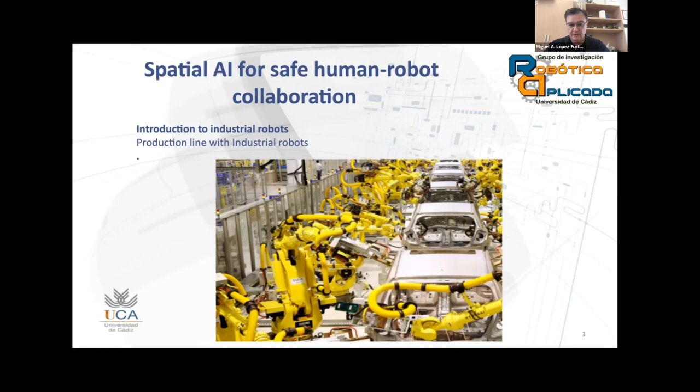About the production line with a lot of robots working without workers. Okay. Well, the typical robots, the classical robots, the brands are KUKA, FANUC, Motoman, ABB, etc. And all of them are directly related to a color. Normally, KUKA has the orange color, FANUC yellow, Motoman blue, etc. But these are the classical robots. Okay, this is the robotic arm, degrees of freedom.

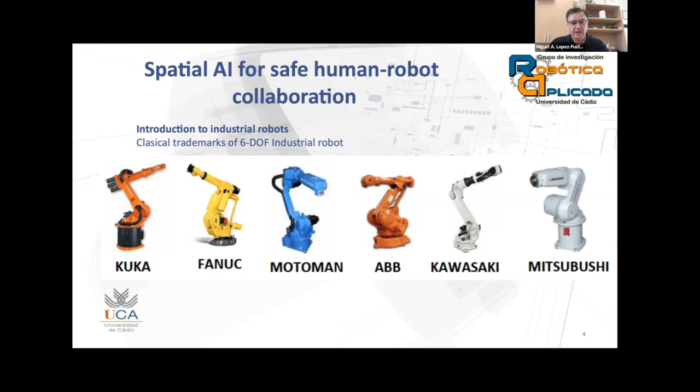The problem, what's this? The classical robot needs to collaborate with the human, and it's possible and it's necessary to collaborate near them. For us, to increase the human-robot collaboration, it's necessary that the robots or around the robot have a lot of systems to ensure the safety of the human. For that, imagine the typical optical barrier or the other things that are normal in the industry. When you try to define the workspace between the human or the worker and the robot, it's necessary to have a protocol to work with them.

In this slide, we can see a lot of ways to collaborate with the robot. Okay, when the robot has no safety system, it's necessary for the robot to be far from the human. When you need to collaborate very near, very close to them, it's necessary that the robot has a protection, or the robot detects, in this case, the force or the collision with the human or with other things.

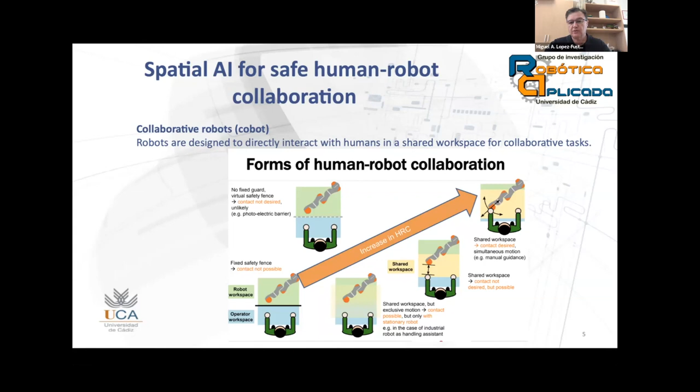Okay. For the audience here who maybe isn't a professional in this field, or maybe has never worked with industrial machines, I saw a very funny sticker the other day which illustrates this point well, and it said, "This machine cannot tell the difference between metal and flesh, nor does it care." Yes. Yeah, that's exactly why we need things like this. Yes, for that it's necessary to have this protection. Now there are a lot of collaborative robots that detect the collision, but it's not enough for the work between the human and the robot. Okay.

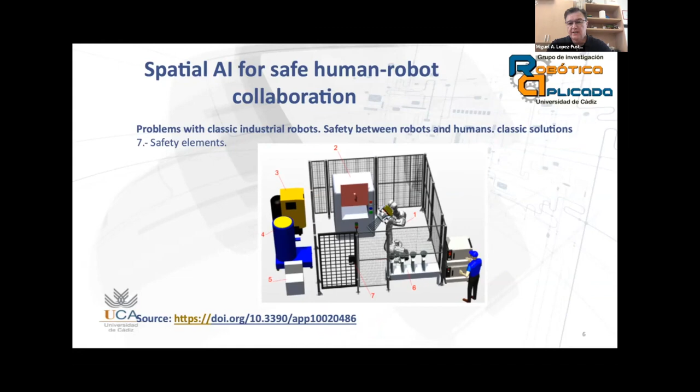And normally, all of them think in use a fence or gate or whatever thing to separate the human from the robot. For that, from 2011, there are standards for the collaborative robot, and they define the way to collaborate human and robot.

There are 4 types. The safety-rated stop monitoring: it means that when the human works near the robot, it stops. For that, inside or around the robot it needs elements for the security of the worker. Type 2 is hand guiding. Hand guiding is moving the robot. It's only for small robots.

Type 3 is when a worker is very close to the robot, the robot does not stop. It moves more slowly, but it depends on the distance. This is a particular way to increase the work of the robot, and our project is related to this idea.

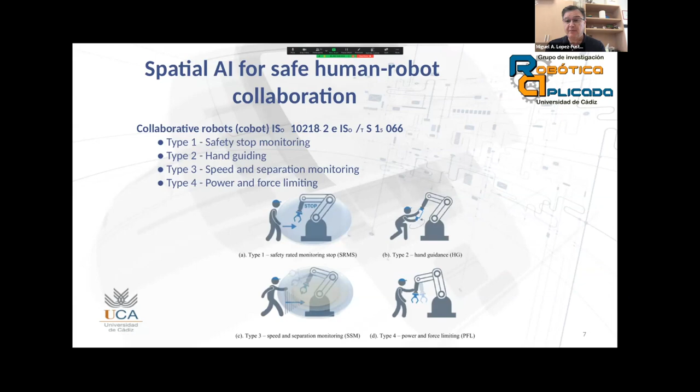We continue, and my colleague Francisco explains the project. Yeah, I'm going to continue the presentation. Miguel has introduced the problem of the human working together with the robot. In the last years, it's very common to need to share the same workspace with the robot in order to do different tasks, such as assembly tasks.

The main goal of our work for the contest is to implement safety assurance on general purpose robots in order to provide collaborative features in manufacturing workspaces. For that purpose, we use the OAK-D Lite cameras. For a robot to be certified as collaborative, it needs to have one of these 4 types of safety features, and we try with computer vision to address 3 of these 4 types.

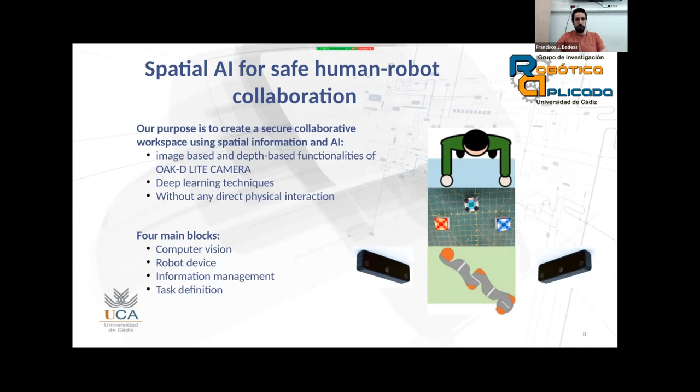So I'm going to talk about the computer vision block. For this, we implement a perception stack. We try to implement 3 different things. The first thing is person detection and recognition. The second one is human pose estimation, and the last one is not for the security, but is for the collaborative task: the object pose estimation and task supervision.

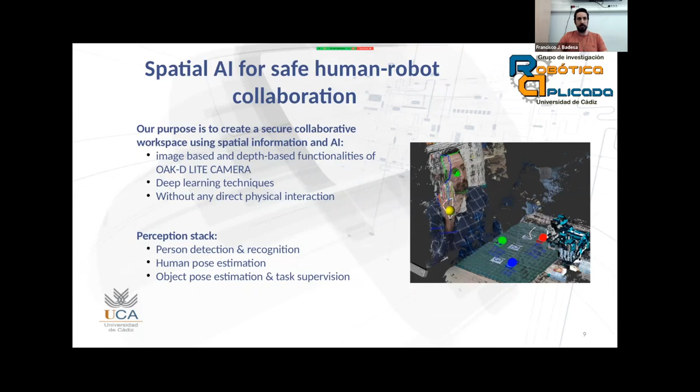I like that you're using the term perception there, because I see that being used more and more lately. Over years, you had very few people talking about perception with spatial computing and computer vision. And I think that's really what's happening here, because not only do you get the visual, but you have depth, you have understanding of what the camera's looking at. And so perception is the right term here.

Okay, so for this first part of the perception stack, we have the person detection and recognition. The main goal here is to modify the behavior of the robot depending on the distance of a user, of a human. So this part of the perception stack is related to the type 1 and type 3 safety features of the standard. We have implemented it with two deep learning models. We use 2 pre-trained models, which are face detection and face recognition from the OpenVINO model zoo.

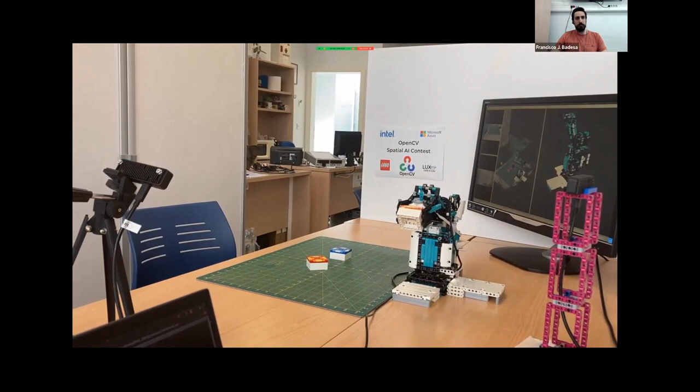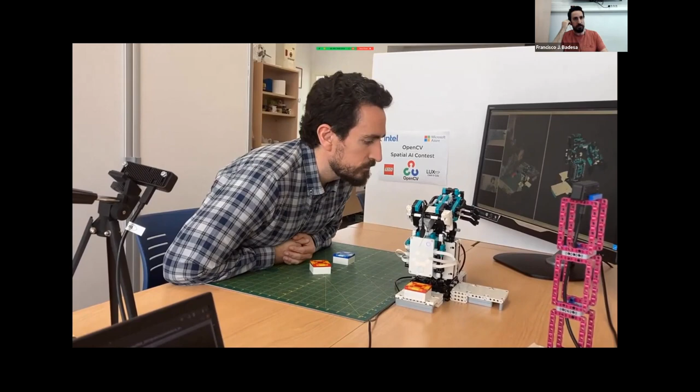Okay, here we can see a video. What we are going to see here is a person that is not authorized. So now he's near the robot, and the robot stopped its movements. And now when he leaves, the robot continues its movements, and when a person is authorized and is near, the robot will change its behavior, changing the speed depending on the distance to the robot. If the person is authorized but is too near the robot, it will stop.

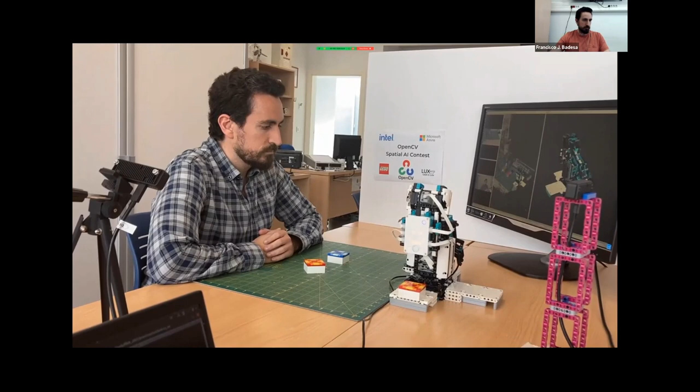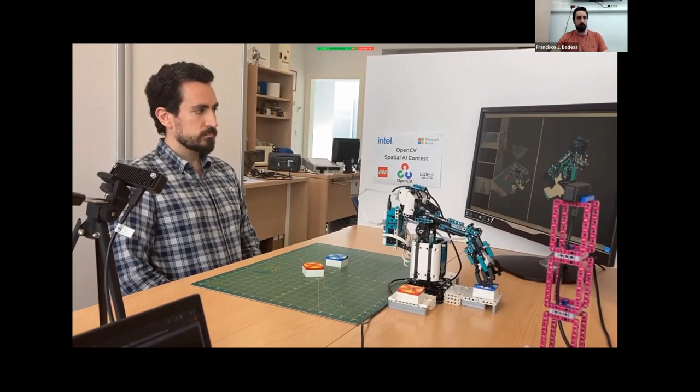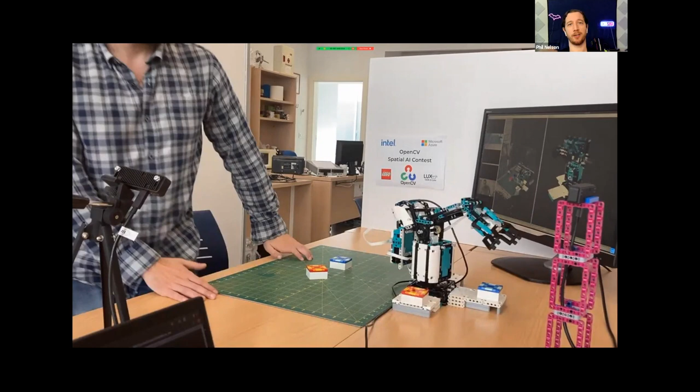That's very cool. So to summarize here again, it's doing type 1 and type 2 here, or I think type 1 and type 3. Yeah. So type 1: if somebody sits down and it doesn't know them, or it knows them but knows that they're not authorized, it will stop entirely. But if an authorized operator or collaborator sits down, then it switches to type 3 mode and slows down and changes what it's doing, which is great. Right.

So the second part of the perception stack is the human pose estimation. In this case, what we are doing here is to hand guide the robot using computer vision. This is related to the type 2 safety feature, which is hand guiding. Normally in certified collaborative robots, this hand guiding is performed with a force sensor, which is placed at the end effector of the robot. But here we wanted to use the 3D information we have with the cameras to mimic the same behavior.

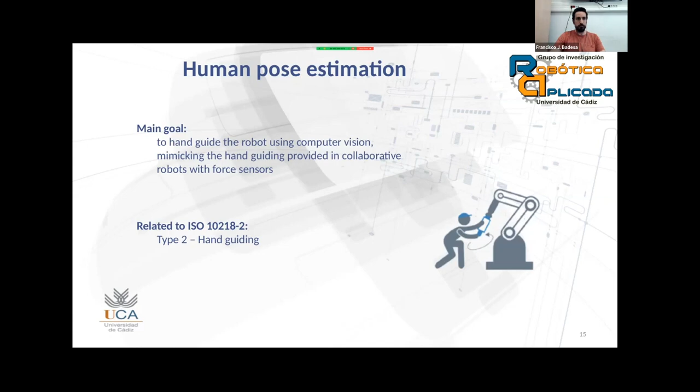So we use the RGB image to detect where the hand is. We crop the image, and we can detect the landmarks of each part of the hand. And also with the hand detection bounding box, we can estimate the 3D position of the hand.

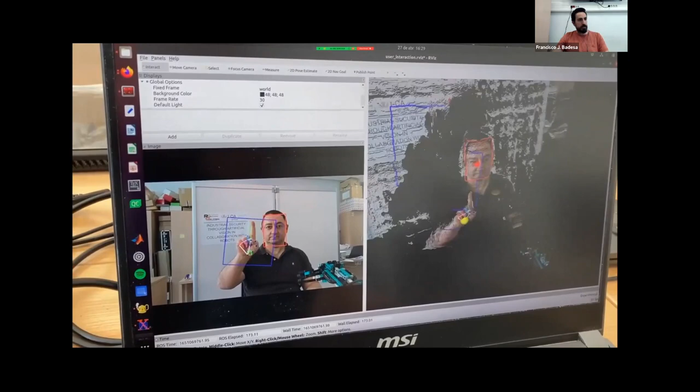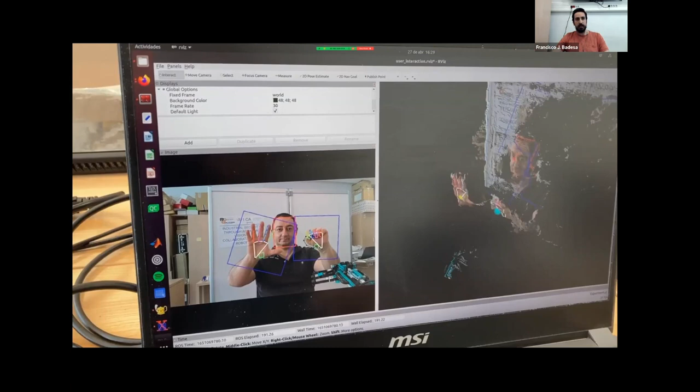So here we can see in this video the result of this part of the perception stack. We can see that we have the detection of both hands, and we can differentiate between the right and the left hands. Here in the 3D part, in the right part of the video, we can see the position of both hands in 3D, and we can see that the right hand is coded with a yellow sphere, and the left one with a blue sphere.

And the last part of the perception stack is the object pose estimation and task supervision. This is not related to the security or the safety assurance levels of a collaborative robot, but we thought that it is another important task we can do with these cameras and with the 2D and 3D information we have with these cameras. And the main goal is to help the operator to perform the assembly task in a correct way.

So here in the picture, we can see that we are recognizing three kinds of Lego parts: the blue, the green, and the red one. And we can see also big spheres: green when this part is in the correct position, and red when the parts are in an incorrect position.

In order to perform this part of the perception stack, we use two deep learning models. The hand palm detector, we use again the hand palm detector from MediaPipe in order to know where the hand of the human is. And the custom object detection neural network with YOLO V4 Lite. And here we can see the pipeline we implemented inside the OAK-D Lite camera.

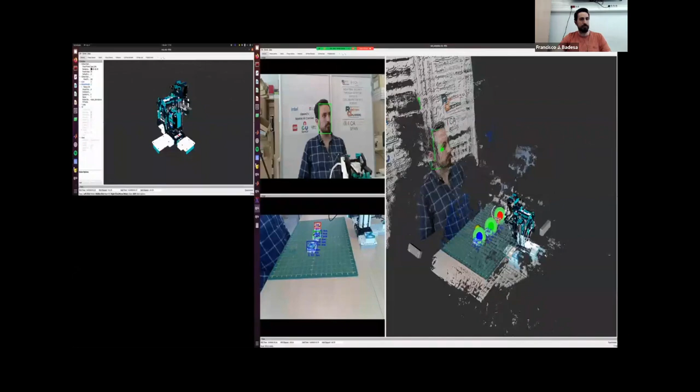I'm going to put another video, the last one. And here we can see that we can move the parts, and we can see in real time if the parts are in the correct order or not. And the gesture recognition is used in order to learn a new order for these parts. So the idea is that we can easily show the system an L with our hand, and this L is to learn that the position of the parts in that moment is the correct one. So it's kind of live programming of our task.

Did you teach the robot to play 3-card Monte or the shell game?

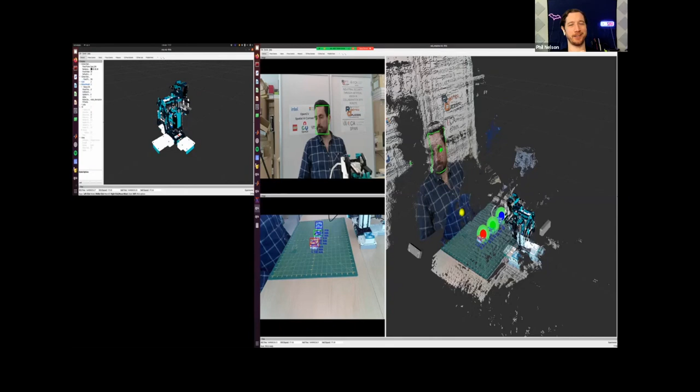You could sell it to the carnival. This is only a simple task. And this is the last slide I have here in my presentation. And now Miguel is going to continue with the rest of the slides.

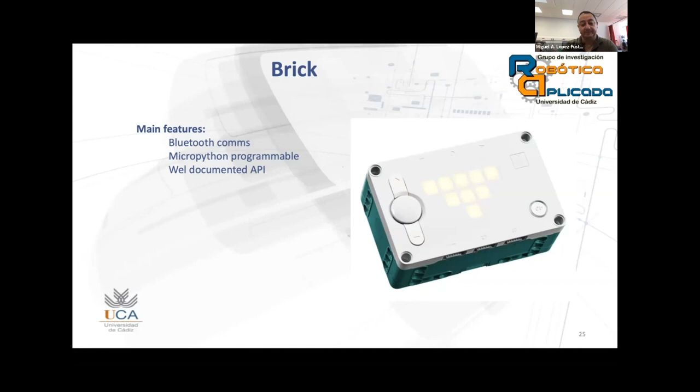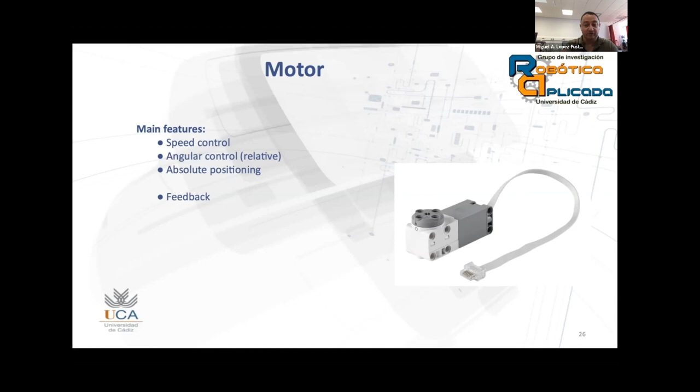The kind of motors that the set brings has a lot of info. It's not a simple motor. You can control the speed, the angular position. So if you have the motor at 0 degrees, for instance, you can say add 25 degrees. Or you can say from the beginning, put it at 45 or 50 or something like that. You have feedback about the position of the robot. Not all motors give you that information.

Being able to do absolute and relative changes is really important for stuff like this. Otherwise, you've got to do other sorts of state knowledge and maths and kind of trying to guess. But if you can just say, go 10 degrees from where you are now, that's so much easier. Or you need more hardware because you need something to count the laps. Right. Yeah. So we have 4 motors, so we try to get a 4 degrees of freedom robot.

So we made some designs. We use the program called LDraw, and we can make it inside LDraw. There are a lot of Lego sets. So I'm surprised I haven't seen this tool yet. We've had probably 5 teams from the contest. I have not heard of LDraw yet. This is very cool. It was a surprise for us too.

So we use that because we can design the model. After that, we are going to use the model to integrate it in ROS. And if we don't have this model, it was so difficult to make something very similar. So we saw that we can export this model to another format and then to DAE, so we can use it later.

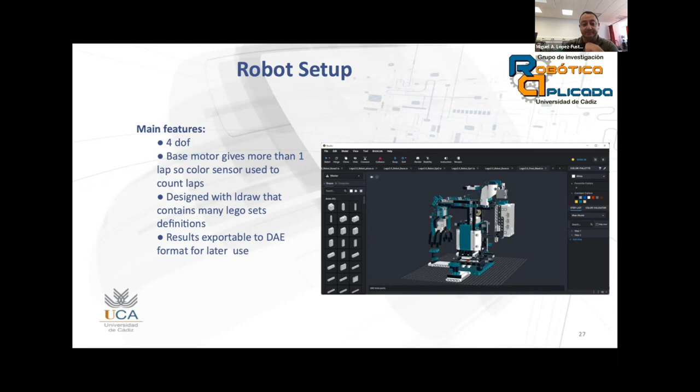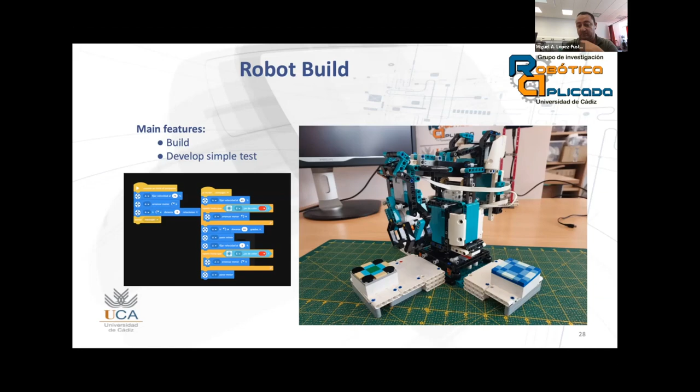And then once we designed the robot and we see that we can make some movements with the robot, we decided to build it. And we make some simple tests with block code to see how it moves and so on. So we have the cameras, we have the robot, and now we need to decide what to do. So we decided to make some simpler tasks where we can arrange some pieces and decide which will be the correct sort order,

and then try to help the user to know if the order was correct or not. And then we try to make it so that if the order has to be changed, it was easy to set up the new order, not to try to change some file or something. And this was the goal.

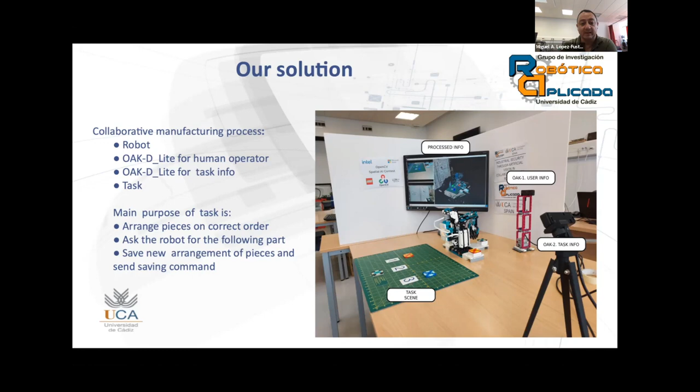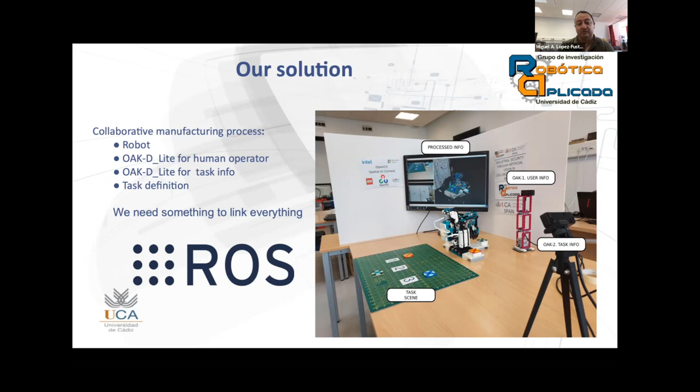And because we have a lot of information from the cameras, and the robot also was asking for information and giving information, we need something that can link everything together. So we decided to use ROS. ROS is called Robot Operating System, and it's a framework that lets you build robotic applications. It brings you a coordinate frame where you can put everything together, and it brings you a lot of drivers for a lot of cameras.

For instance, the OAK-D that we use has its own driver, and you have a lot of other libraries that let you make things very quick, because you can share those libraries in different projects. And also DepthAI brings us a special detection message that is the message used in this project. The message is used because you develop some nodes, and all those nodes share information via the passing of those messages.

Unfortunately, the Lego brick lacks support for ROS, or at least we haven't found anything about the Lego brick and ROS. So we had to develop a special driver for this brick.

ROS will be well known to many of the habitual viewers of OpenCV Weekly Webinar. We've had Kat Scott, the developer advocate for Open Robotics, on the show a few times. And in fact, they just released ROS 2 Humble Hawksbill recently. So congratulations, team, on shipping that. We're gonna have to try to get ROS and Lego to have some official collab, right? Next contest, it'll be important.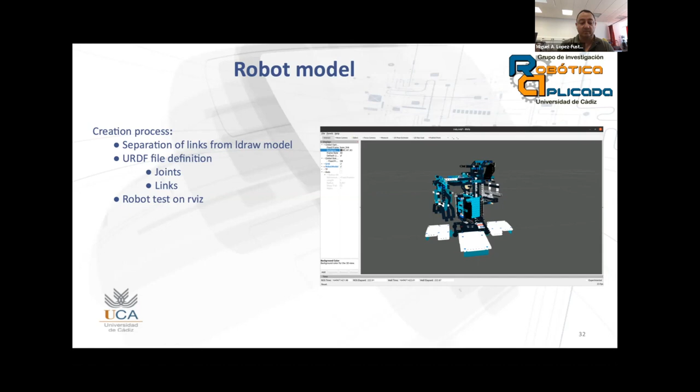We have a GitHub with the things that I'm going to share in the next slide. We designed and built the robot, so we tried to pass this robot to ROS. So we had to make the URDF file where we define the links of the robot and the joints. So we have to explode the robot in different links and make it work on ROS. After we have that, you can see this is a screen from the RViz tool from ROS. And once we have this working, we have to make it move.

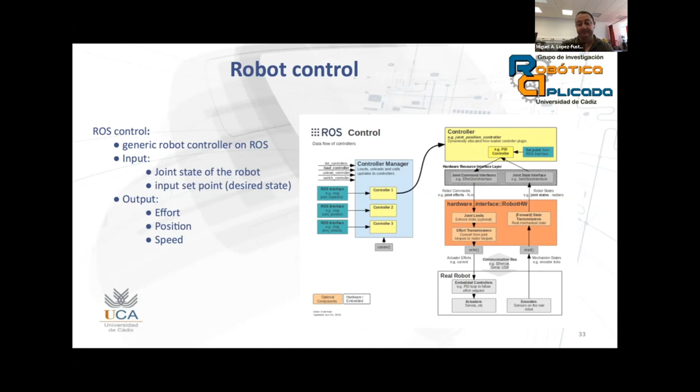So we tried to make something general that not only will work with the Lego robot. As you can see, I don't know if you can see here, but we have other robots, and we wanted to use it later with these robots. So we decided to use ROS control. ROS control is a generic robot controller made on ROS. So many of the things are already defined, and you only have to define the orange box here. So we need to develop this orange box for the Lego brick controller. We have developed that part, and we have shared it on GitHub. Awesome, that's very cool. Always happy when people open source things.

Okay, thank you. For this part, we have developed the hardware interface part of the Lego brick in MicroPython. The host is a laptop and communicates with the brick via Bluetooth, and it works very well. We have only had some problems: the robot needs to be connected to another laptop via USB cable, because if we remove this cable, the Bluetooth, we don't know why still, but sometimes cuts the connection. But if you connect the brick, the Bluetooth works very well.

And then we connect the Lego brick to the laptop via Bluetooth, and then the Lego brick sends the feedback information from the motors to the host, and the host sends the commands, that is all the movements that the motors have to do to reach the desired position. So you only have to say to the laptop where you want the robot to be, and then the hardware interface and ROS control make the magic.

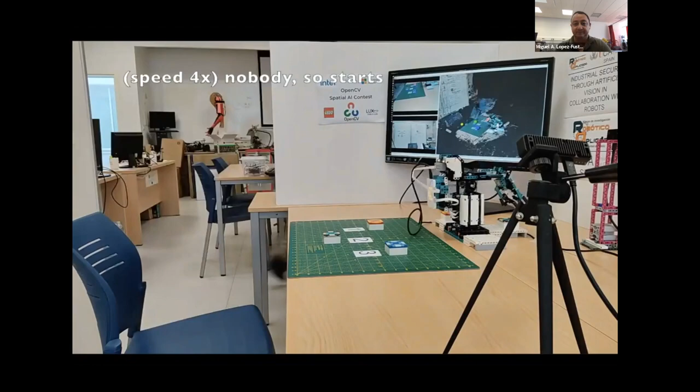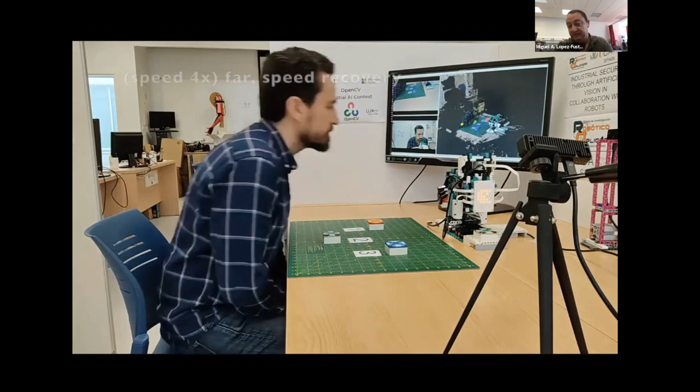I will try to explain quickly the things that are happening here. So in this case, I am not authorized. So the robot stops. And now Javier is authorized. So the robot keeps working. And if he gets closer, the robot stops or slows. This is the programming part where you can move the hand and can open and close the hand to grip the piece.

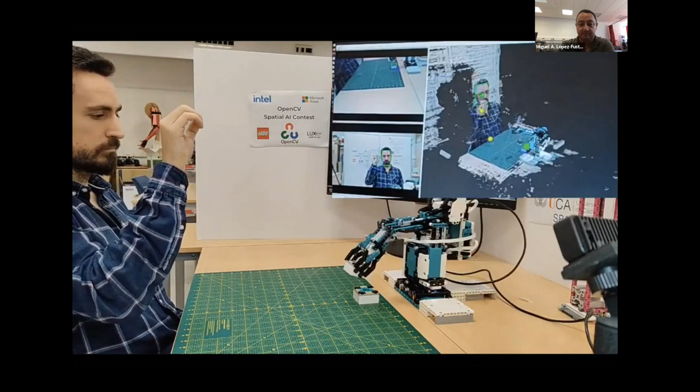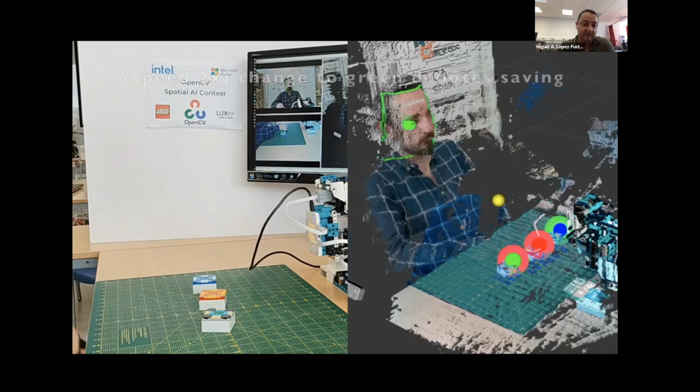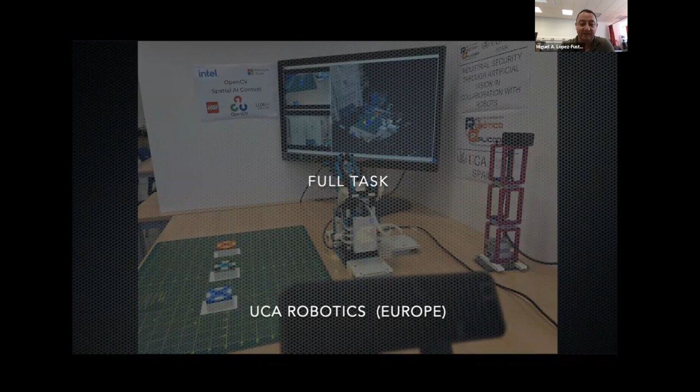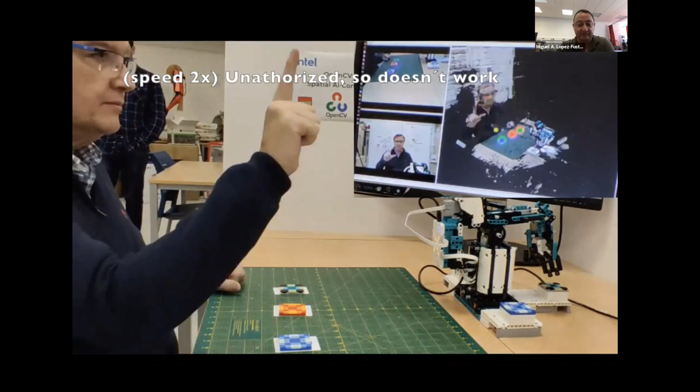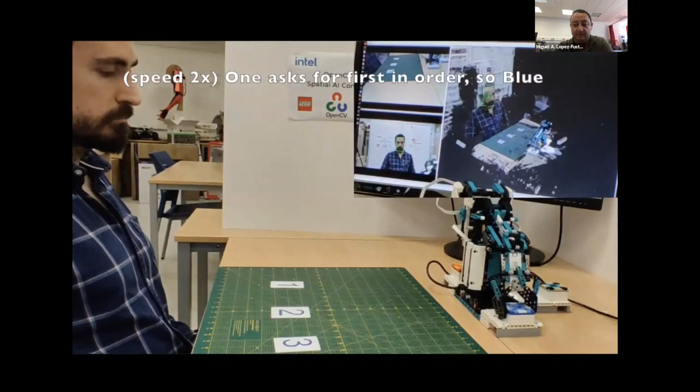This video from the right, it's directly from the Ubuntu, so it's saved from the Ubuntu. So these jumps are not from the camera, they are from the laptop. And this is the full task. Arturo is not authorized, so he can change the pieces, but the robot doesn't move. Javier is authorized, so the robot says okay and moves. And when Javier wants a piece in the new order, it gives him.

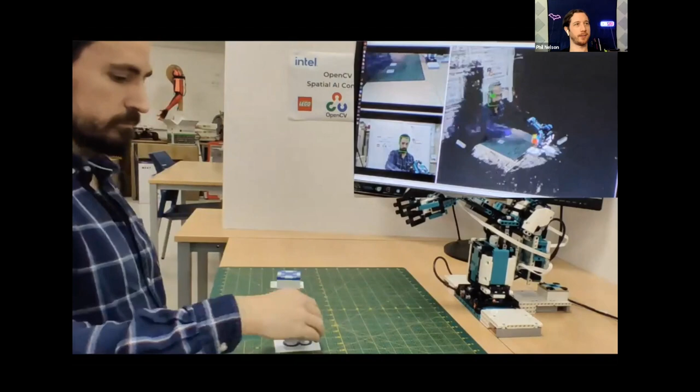I want one of these like at the sushi bar, you know, I can just reach up and grab and put it on my plate for me.

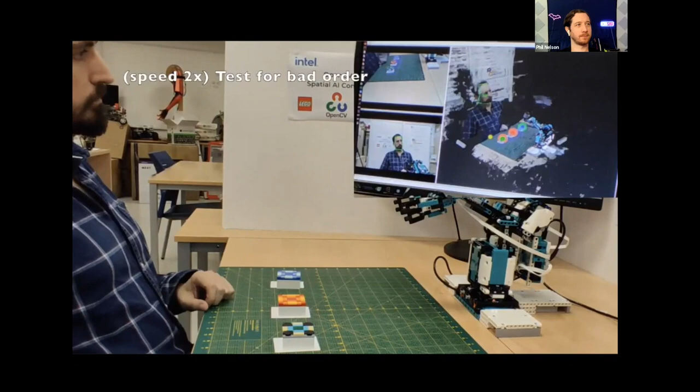Well, okay, we can cut here because I think that this is almost the same that we have told. So in the last one, when you gave the prizes and so on, you were talking about how it would be good to see that working on a big robot. So I think the prize event was on Monday, and on Wednesday we had some tests.

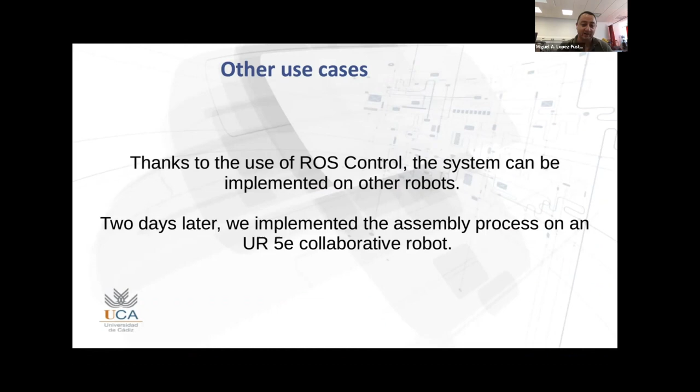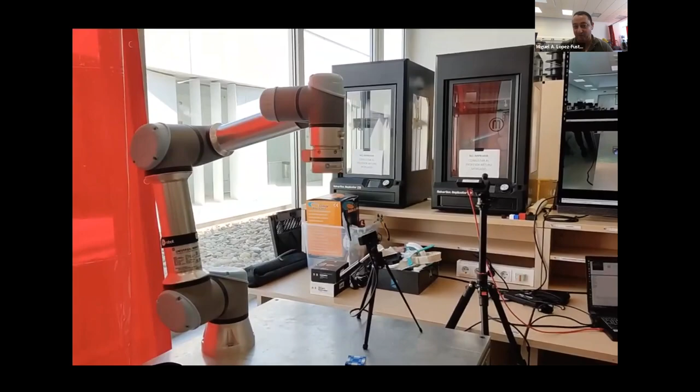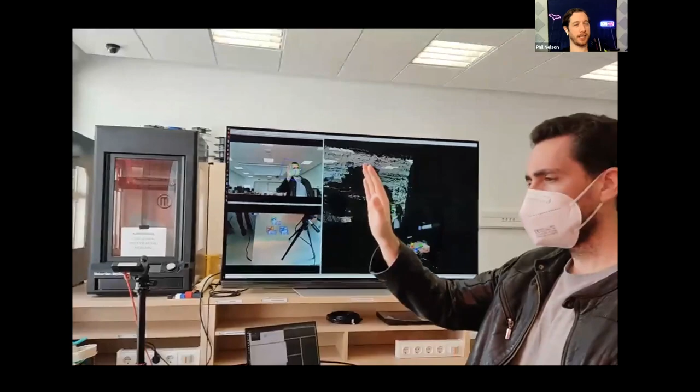We did some tests. Wow, you said you had a surprise. You weren't kidding. Yeah, that was a surprise. For us, it was a surprise too, because we designed that to be working on a big robot. We have experience on that, but we didn't know if it was going to work so quick. But it was working 2 days later. That's incredible! Wow. Yeah, from Lego to industrial robot in just 2 days. That's a heck of a quick journey.

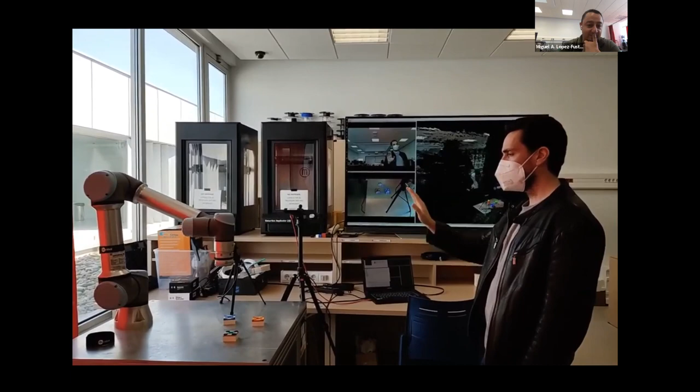You can see the cameras there. Mm-hmm. Oh, you can see the screen back in the TV. That is so cool. So it has been a good experience to work on this contest. Just wow. Yeah.

Extremely cool. So what's the name of this particular robot arm? This is a UR5e, I think. Very cool. I can see my screen, but when I leave the screen sharing, I can show you. Cool.

Yeah, most people probably do not know this, but for a long time at my old job at Occipital, one of our internal running jokes was robot arms. We only raised money till we could buy robot arms. That was the joke. And so this is very cool to see.

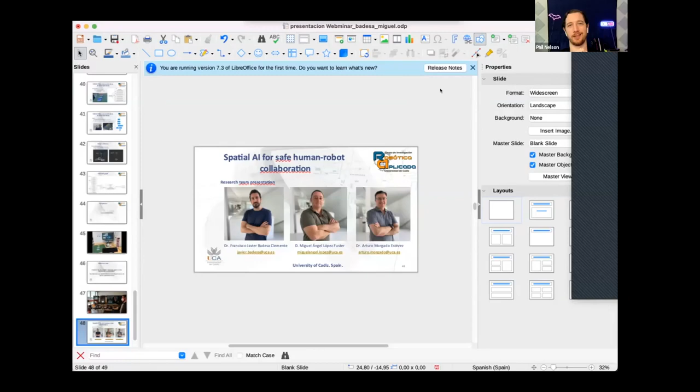Gosh, yeah, I'm really amazed that you were able to take this contest project built on Legos, and then in 2 days apply it to an industrial scale robot. It's mind blowing to me. I'm really impressed. This is actually the reason why we wanted to do this competition, right? We wanted to make it real for some robots, to do stuff using OAK with computer vision. So yeah, truly amazing.

I have to say, we did not see this video at the time when we were ranking the competition, right? The competition video was mostly focused around the Lego. So for me, I'm truly amazed right now. Yeah, that's what they were saying, they implemented this right after we had announced the winners, I think, but they still got second place, so not too bad.

Well, we were lucky because the deadline was on Friday, but you extended to Monday, so we could finish. Yeah, if there's one thing I know, it's that engineers love to wait to the last minute, because I am an engineer and I like to wait to the last minute too. But yeah, you nailed it. It's a heck of a project. So we've got a couple questions here.

An interesting note here from Howard in the chat. Howard asks, are you aware of the NIST draft on risk management with regard to safety? He's a member of the IEEE Artificial Intelligence Standards Committee and is looking to formulate a recommended practice of a tiered approach to this problem. Do you feel that this would help folks in the area that you're working on now? According to Howard, this NIST draft is extant. He posted a link here. I'm going to go ahead and post it in the chat.